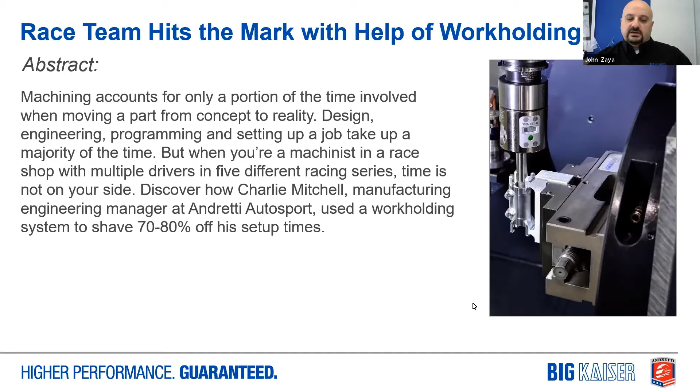Just a quick little background. Big Kaiser and Andretti have what's called a technical partnership, and this is more of a two-way street relationship where rather than just being a financial sponsor, we're more of a partner. And so we provide Andretti with tooling and expertise that we have, and then that provides us the ability to use Andretti to bring knowledge of Big Kaiser to the market as well.

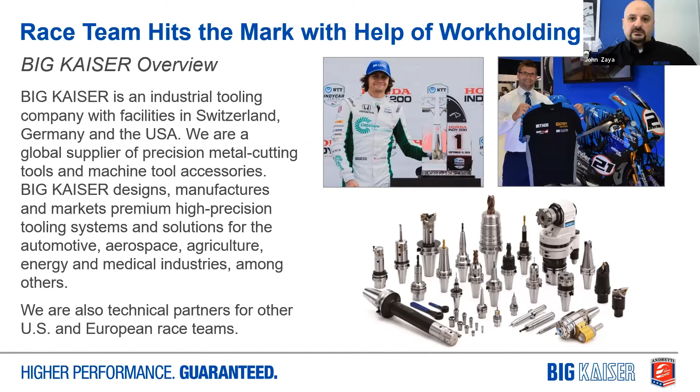Big Kaiser here in the US, as well as Big Kaiser in Europe, also sponsors other race teams, but we're all basically technical sponsors in the same manner. So our counterparts in Europe are doing the same thing, providing tooling and expertise in order to make the team work a little better, not just providing the financial aspect that a lot of people have that misconception of. So Big Daishowa, our parent company, provides tool holders, collet systems. You'll see a little bit later on, one of the key tools that Charlie saw that we offered was an angle head that allowed him to do something really intricate on a new workpiece that they're doing.

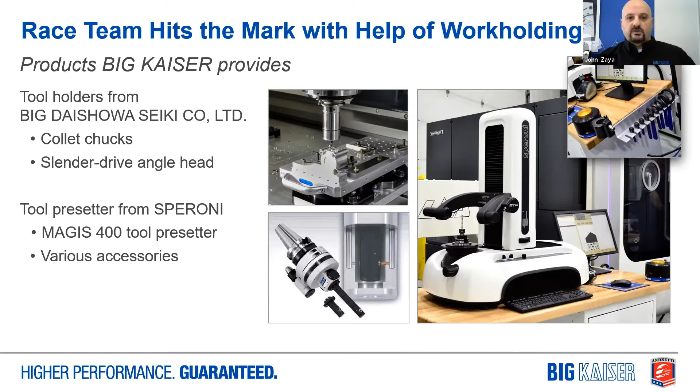Another company that Big Kaiser represents is Speroni, which is an Italian tool presetting machine. And so by taking the tool presetter and our tooling, Charlie's able to kind of get things started at the very most basic level and get them working very well, so that he's starting on a very good foot with really good product behind those specific applications.

So Big DAISHOWA, like I said, our parent company out of Japan, sells extremely precise collet systems, tool holder systems that Charlie is able to take advantage of to make his parts to a higher level of accuracy and a higher level of quality, because he's able to support the cutting tools with a very good tool holder behind it. One of the key benefits of machines that Charlie has at his disposal is that they're all Big Plus tool machine interfaces.

And so for those of you that might not be familiar, a conventional spindle and tool interface will have a gap between the front face of the spindle and the tool's V-flange. When you convert that over to a Big Plus tool and spindle combination, that gap is bridged by both the tool and the spindle, and that creates a simultaneous fit face that now provides a lot more rigidity to the tool holder, but also more accuracy to the tool and spindle interface.

So if you're doing a heavy operation, you can gain the rigidity that you're looking for. Or if you're on the other side and you're looking for more accuracy or more precision, you gain that because now your tool isn't being pulled up into the spindle at higher RPMs or anything like that. So all of this leads to tools that make better parts.

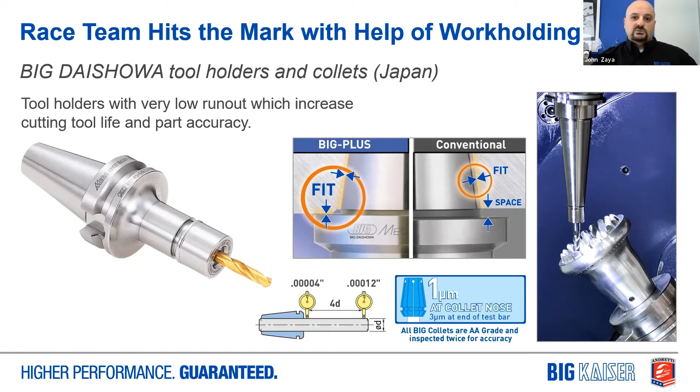Another item that Big DAISHOWA provides that Charlie keyed in on was what we call our slender drive angle head. This is an angle head that has a very, very small output that allowed him to get down inside of a workpiece in order to drill some cross-drilled holes on a very cool workpiece that's part of a bigger system that Charlie can go into a little bit.

Yeah, these are actually shocks. It's not a normal shock. It actually has a shock and a damper. They're very high-tech, very expensive pieces. We spend a lot of time and effort and money on developing and building these dampers. We call them dampers. With Big Kaiser and John's help, he's able to help me come up with tooling and fixturing that gives me the ability to make the engineers' dreams come true.

And with this particular tool, the 90-degree small head, I had to get into a very, very small bore and drill a very small cross hole, and it wasn't going outside. I couldn't get it from the outside. The DMU 50 was the perfect machine to machine this part, but I had to get into the hole. John sent over this 90-degree head, I put it in there, and it worked flawlessly. It really accepted what we wanted to do.

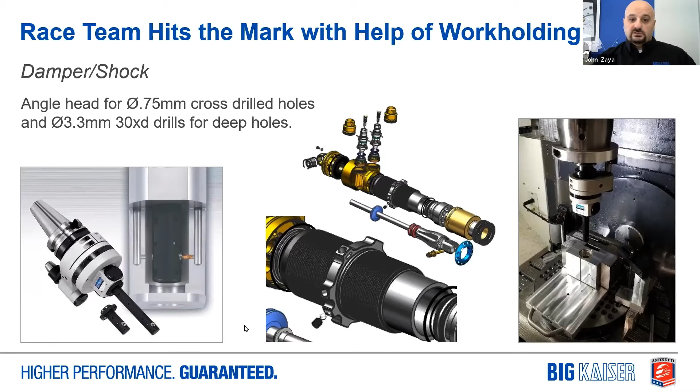So the other aspect with any kind of tooling is measuring the tool, because you have to know that specific tool's length offset in order for the machine to use it correctly. Keeping in mind that the theme of this presentation is about work holding systems and setup reduction, another place where setup reduction can take place is at the tool presetting station. Speroni, the manufacturer that makes these tool presetting machines that we sell—basically the concept is that instead of wasting time at the machine presetting your tools or measuring your tools, you can do that offline in a tool presetter, and then allow your machine to keep running and doing what it needs to do.

Now, where this gets a little complicated is that even under one roof, you can have multiple machine types with different types of controllers. For example, Charlie has 3 different controllers he has to deal with, each with a different setup and layout. So what we're able to do is take the tool's data—the length offset and diameter—directly from the presetter and push it directly to the machining center. This prevents you from having errors during the data entry process of getting the tool's length into the machine. But Charlie will go into a little more detail as to how this was beneficial for him.

So my philosophy is to take racing and what we do—because we chase the clock all the time—and implement that racing mindset into a machine shop. With continuous improvement, you can come up with really good ideas to get your machining cell or your small shop to produce parts a lot quicker. We look at programming setups, tooling setups, then cutting the first piece and producing the parts you need. All that takes a lot of time, and I'm wearing all those hats at the same time, so I had to let my imagination run wild and take the racing philosophy I have and implement it into the machine shop.

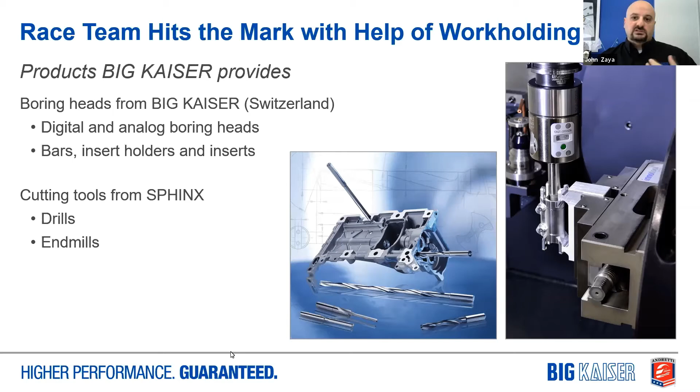Unilock is what we call a 0-point workholding system, manufactured by a company in Austria that we represent called Innotool. It's a system composed of a series of styles and types of what we call clamping bases or chucks that are mounted to the machine table. This creates a fixed reference point, or 0 point, that allows you to load and unload parts, fixtures, vices, almost anything you can attach a retention knob onto.

All of that provides 5 microns, or 2/10,000ths of an inch, of location repeatability, so that you can rely on the system to take your vise or fixture out, set it aside, and when you need it again, bring it back in and have that location repeat exactly where it was previously.

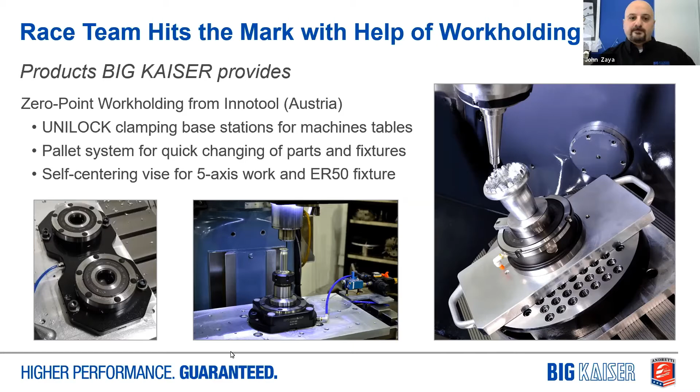So a lot of times customers will come to me and say, well, why should I implement using Unilock? And it boils down to basically three points.

If your company should have a philosophy of process improvement, a continuous improvement process for long-term or short-term products being made. If you're looking at fast-tracking R&D or prototyping projects where you can't have a huge investment in something that may not go very far. But also if you're looking to reduce errors, reduce wasted time, reduce scrap material, and save money—those are the 3 big points that any kind of workholding system like this will benefit you.

So we're going to take a look through the following slides of different application examples that Charlie and I have worked on over the years, so you can see how we've taken some of these concepts and applied them to the race world. But in many cases they'll apply to any industry—aerospace, medical, automotive, doesn't matter. They'll apply to pretty much any size part, whether it's a small little part or a huge tractor-size workpiece. The concepts are all the same.

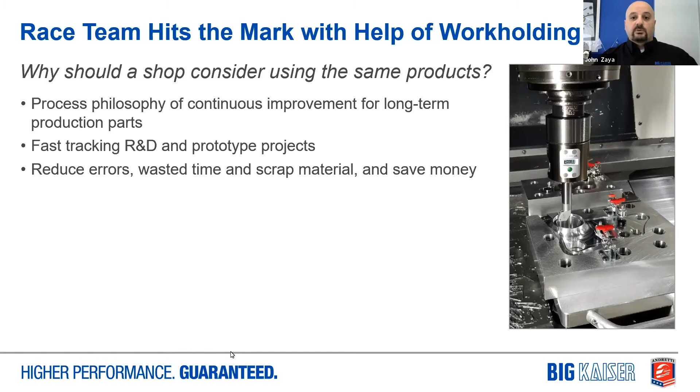So this first application is kind of simple and straightforward. It's called a baffle, and it was actually part of the damper that Charlie was discussing earlier. It's a small circular workpiece that has a series of holes drilled at various angles. Charlie approached me with a concept he had been familiar with in the past, which a lot of people use today, called soft jaws.

This is where you take the hardened steel jaws off of a vise and replace them with soft aluminum blocks that you then machine a pocket into, mimicking the workpiece's profile. In this case, it would have been just a circular profile.

But Charlie knew that this system, this concept, although it works well, has some drawbacks—one of them being that sometimes you have to stay at the machine in order to load up the soft jaws. So his initial concept had 8 workpieces, and he thought, well, I think I can do better than just 8 parts. So he tapped me for an idea, and I said, well, I would look at a pallet.

So I came up with an idea, and my pallet had 12 parts. I was like, oh great, I got 4 more parts. And then Charlie was like, well hold on a second, I can take that even further and put 16 parts on a pallet. So he was able to take my idea, run with it, implement it, and figure out a way to make himself even more productive.

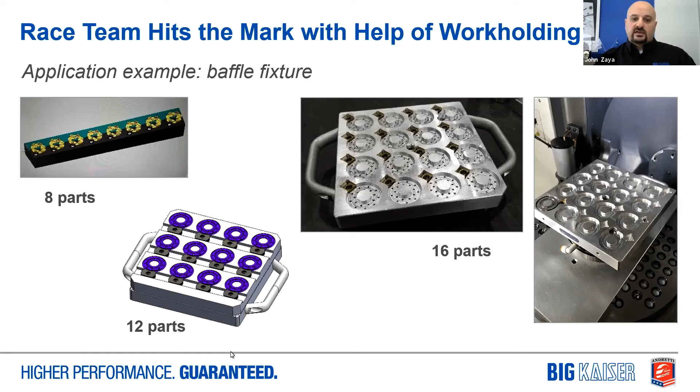But keeping in mind the philosophy of continuous process improvement, even in the 4 years that Charlie has been with Andretti, he himself has been able to figure out ways to do what he was doing back in 2016, but by implementing a new fixture or new process, he was able to make the work pieces, i.e. his rockers, to a higher level of accuracy as well.

Yeah, this is interesting. If you look on the far left-hand side, you'll see the 2016 setup that I had. Operation 1 was the left vise, the center vise was Operation 2, and the third pallet was Operation 3. On the middle vise, I was using the Big Kaiser digital boring heads, and those rockers have 4 different size holes in them, all plus or minus 2/10. The piece is aluminum, and I'm sure you'll understand the problem I ran into.

I'd have to put a torque wrench on that middle vise and try to torque it as low as I possibly could to make the boring bars go in there and cut that bore so I'm not distorting it.

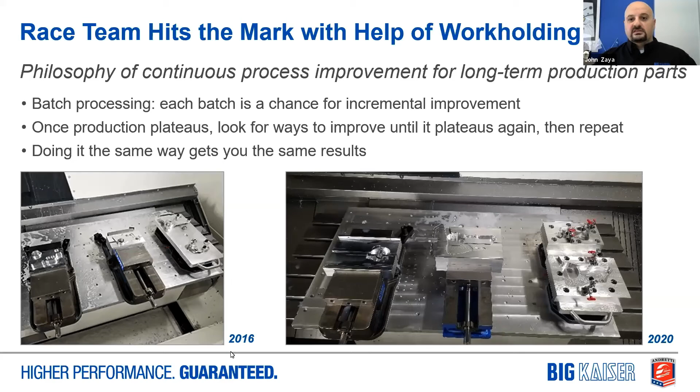Speaking of hitting numbers, a lot of customers that have started using Unilock on their machining centers have also found that another place where they have a bottleneck oftentimes is quality control or inspection. So one of the things some companies using Unilock have been doing is putting it in their quality room or on a CMM. This allows them, in certain cases, to take the part and its fixture from the machine over to quality, have it inspected, checked exactly how it's being held, and then with whatever changes need to be made, go back to the machine, have it locate within that 5 microns, and be able to make whatever adjustments they need to the workpiece at that point.

As Charlie mentioned, sometimes your numbers in the machine are great, and yes, there's a lot of in-machine probing and measuring going on these days, but sometimes there are features that you might be able to get to with a cutting tool, but you can't get to with a probe. So sometimes you've got to take the part out in order to take a good measurement. That's something we've seen a lot in newer applications with certain customers.

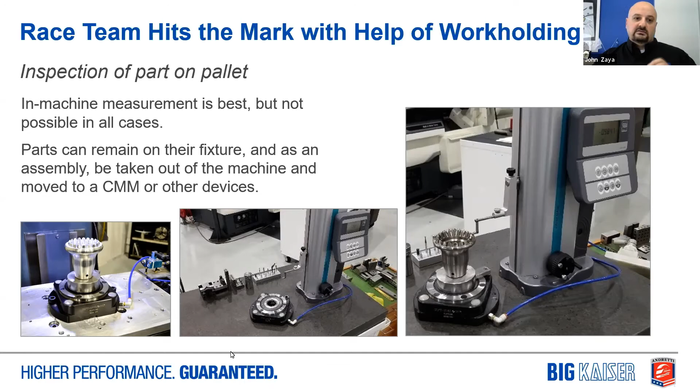But also one of the key things, and one of the main concepts Charlie has to deal with, is when you're looking at R&D projects or prototype projects. Those are 2 types of projects where you can't really justify a large investment into fixturing and tooling. So sometimes when you want to try something out, you need a quick way to do it. Building a big custom fixture sometimes isn't the best way to do that. When Charlie's dealing with his engineers there, sometimes they'll have an idea and come to him with, okay, we need this by Friday. How can we get it by then?

He'll figure out a way to make it, because he's using the Unilock system behind it, either on their manual machines, like you see in the images here, but also in all of their standard CNC machines as well. So he's able to move very quickly and very accurately between any type of production part, like you saw earlier with the baffle, or with R&D projects and things like that.

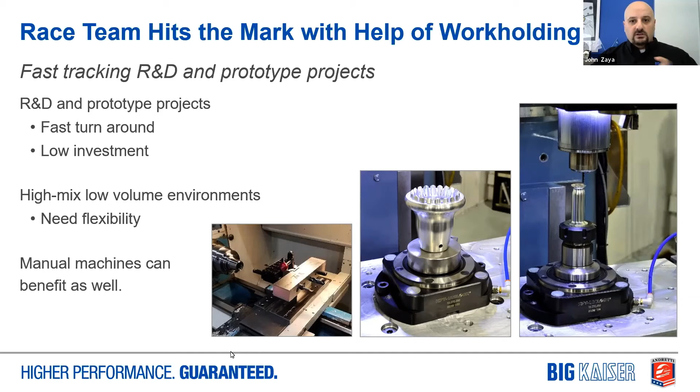But what's also really nice is when you have to deal with customizable parts. This application is really interesting, it's a steering wheel, and you can tell the controls are there in the middle, but every steering wheel is slightly customized because each driver has different hands. So Charlie will discuss how he's dealing with the fixturing for this type of part.

Yeah, this is interesting too, but I want to touch real quick on what you were talking about, doing the prototypes and the production stuff. One of the interesting things that happens to me a lot is now that we have somewhat of a production going on, and I try to keep the machines running all the time, I'll have a particular job in there that I'm making parts, and we'll have some sort of emergency job, urgency that we've got to get done. It's going out to testing or whatever the problem may be. What I'm able to do is pull off that job that I'm working on.

It'll be on a pallet. I'll just take it off the machine. I'll put a new pallet on there, put the prototype on there, change over my work coordinates, run off that prototype, and then I'm able to actually take that part off and go ahead and put the job that I was running back on there.

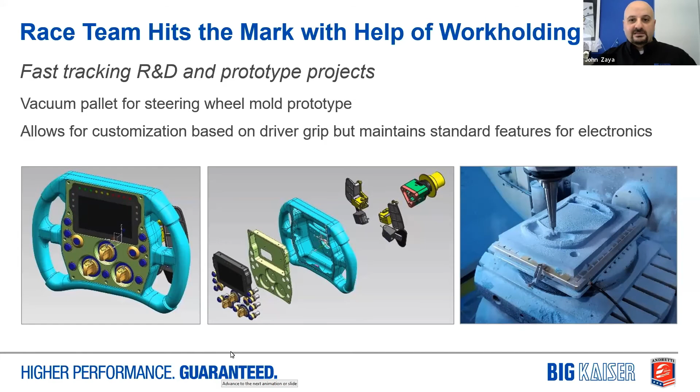Yeah. So keeping in mind the R&D and prototyping mindset, as Charlie alluded to, whenever you're dealing with this type of an environment, you're not doing the same thing over and over and over again. You're constantly switching between one part and another fixture and a different fixture.

So in some cases, if your part takes a long time to run and somebody comes up to you with an urgent request, the ability to swap fixtures out mid-program or mid-run allows you to not have to delay something else to do something very quick, and allows you to get back up and running to what you were doing very quickly and easily. So all the work holding that we've been looking at, whether you're in a production environment or a job shop or a race environment, is designed to help the changeover process go a lot faster.

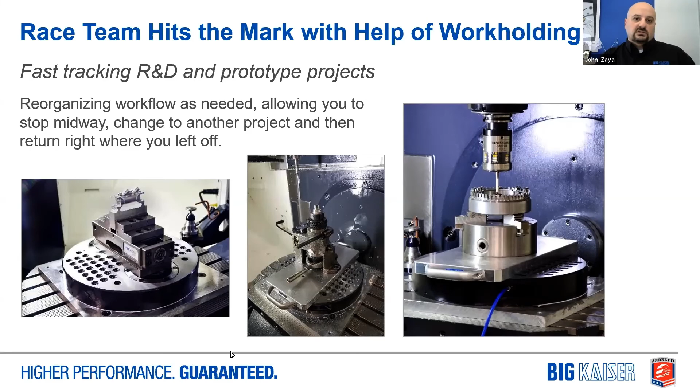And so just to summarize, the three reasons why most companies come to a work holding manufacturer like us is because they're looking to reduce wasted time, save money on fixturing, and make themselves more flexible. Because they've come to the point where they realize that, okay, we are able to make this part in a certain number of minutes or seconds, but every time we have to change from one to another, that's when we're losing a lot of time and wasting a lot of money.

Or we don't have our setup guy anymore, and now we have to do things ourselves rather than rely on a single person to do all that setup. So making the system quick and accurate is great, but it's also convenient because now you don't necessarily have to have a dedicated person doing all of that fixture changeover or setup time.

And like we mentioned earlier, don't have blinders on thinking setup time is only at the machine, on the machine table. Setting up the tooling ahead of time, offline, using a tool presetter is a great way to also save time as well as expense, because everything boils down to a cost. And so making sure that you can have that cost reduction as fast as possible with Unilock and with tool presetting and with good cutting tools and tool holders, all of that comes together to make yourself more productive and more attractive to whoever your customer might be.

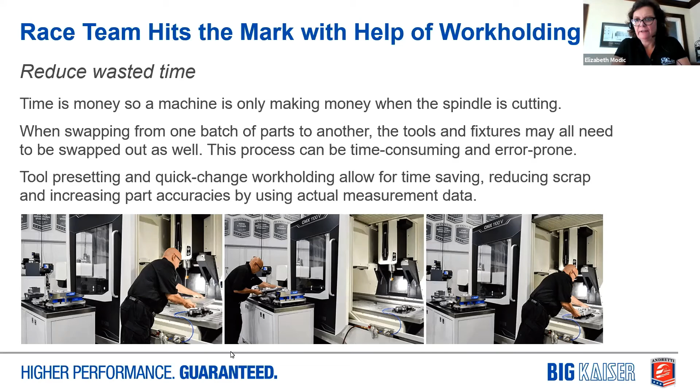Yes, we do. So we do have a few questions. We have different types of machines. Can this system be used on horizontals? Yes, we didn't really touch base on different types and styles of machines, but yeah, a horizontal machining center, EDM machines, even grinding machines. The Unilock system can be applied pretty much anywhere that you can use a quick change system to help reduce your setup. So a horizontal, whether you want to talk about the face of a tombstone or the entire tombstone itself, we have customers doing that also.

Great. And another question with the Unilock system, do we have to have the air connected all of the time? No, that's a very common question. The Unilock chucks are essentially spring closed and air to open. So a lot of people like to think of truck trailers. Their braking system is designed to operate under air pressure to open or release.

So we have plenty of customers that specifically, like when you have to deal with a rotating application like the tombstone on a horizontal or a 4th axis indexer, where you can't keep an airline connected, you can disconnect the airline once your fixture is loaded. The springs are always there, they're always present, and they're always clamped. And the system won't open again until you apply air pressure to release it.